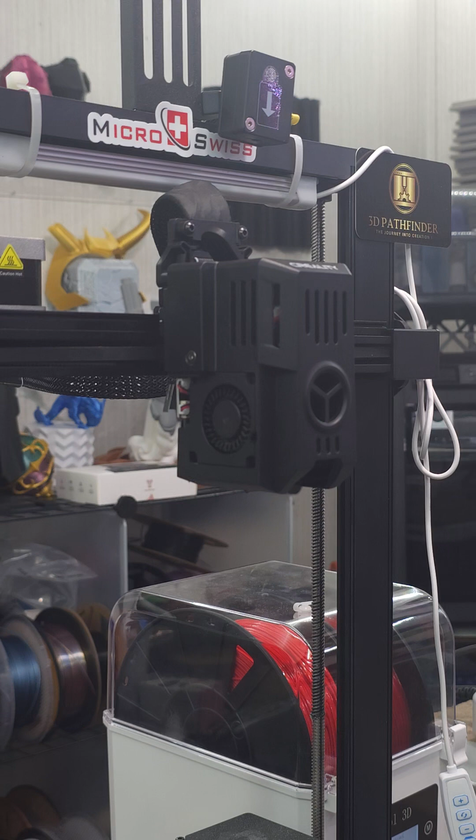What's going on, everybody? Because I don't have a cameraman or anything like that, I'm going to be doing an install on the new Flowtech Hotend Upgrade for the Ender 3 V3 KE, on this guy right here. Now, the directions in this kit are very, very good. It comes with a full set of directions, as you can see, and it walks you literally through the whole process of installing this hotend.

Now, the tools that you're going to need for this: a 1.5 millimeter Allen wrench, a 2.0 millimeter Allen wrench, and a 7 millimeter wrench. Okay, so what we're going to do here, and actually, do I have a 7 millimeter wrench? Let's see. So in the box, you get your brand new heater and a brand new hotend.

Okay, and this is your heating core. You get 2 small titanium screws, and you get a heatsink adapter. I think, what do they call this? They call this copper thermal adapter. Okay, so that's what you get in the box. So I'm going to set that here.

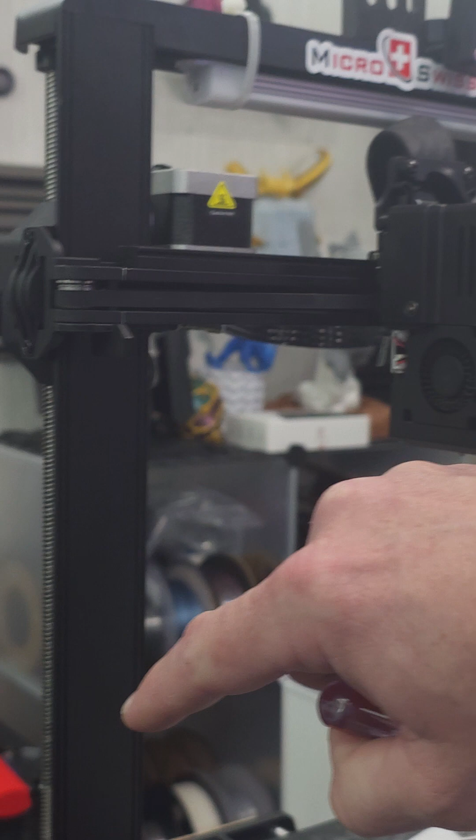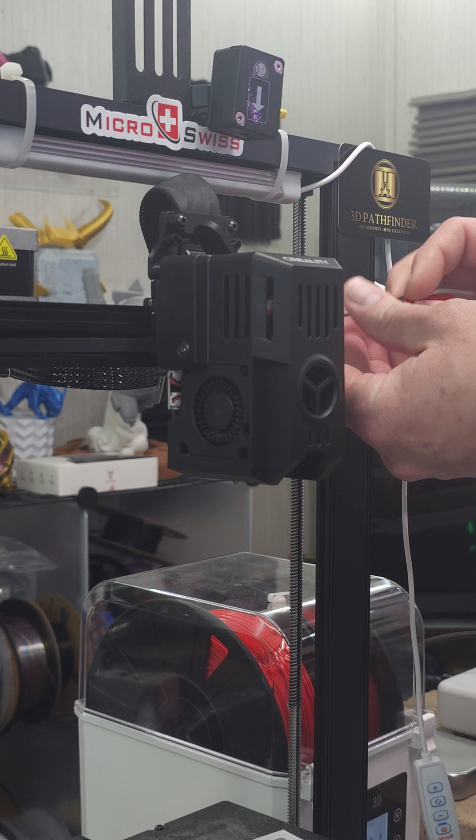Now, first step, what I did do, I powered off the machine and I unplugged the electrical cord. As you can see, the electrical cord is unplugged right down there. So first, as it says right here, remove the 3 screws securing the fan shroud and pull the fan shroud off of the print head. So we're going to start right over here, if I can get this kind of crammed in here, and start pulling these screws off.

And actually, while I'm thinking about it, I wonder if one of these is 7 millimeters. Let's see. Let go. Okay, I'm going to use some magnets here to hold the screws. Set that right here. Okay, we got one more screw over here. Pop this off. There we go. And then this fan shroud should come right off.

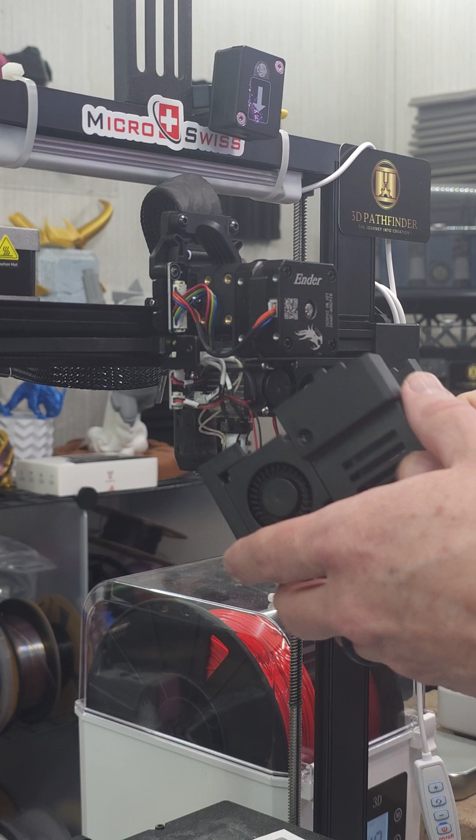Okay, there we go. So we have the 2 connectors right here. It says disconnect the 2-part cooling fan cables from the breakout board. Let me see. I had everything set up, didn't I? Now, if you're first doing this, these are going to have some adhesive on them, just a little piece of hot glue. You're going to have to pop those off.

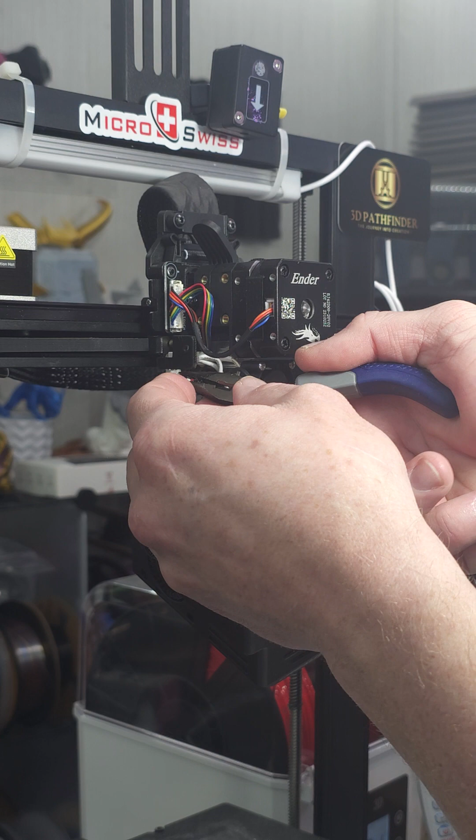Actually, I'm going to put my headlamp on just to get a little extra light here. There we go. And I'm going to grab that little glue blob and try to pull it off. Come on. Well, that other one popped right off. You got to be careful, some of these wires are small. There we go. All right. Got that second little glue blob off.

Then we're going to pop these out. Now remember, this fan goes to the bottom one, and the other fan on the other side goes to the other one. So we're going to pop these out right here. There's that one. And then I might need to use my little things here to grab this connector. Some slack on that right there, and I'll pull that one off. Okay, that might be a booger to feed back through, but there we go.

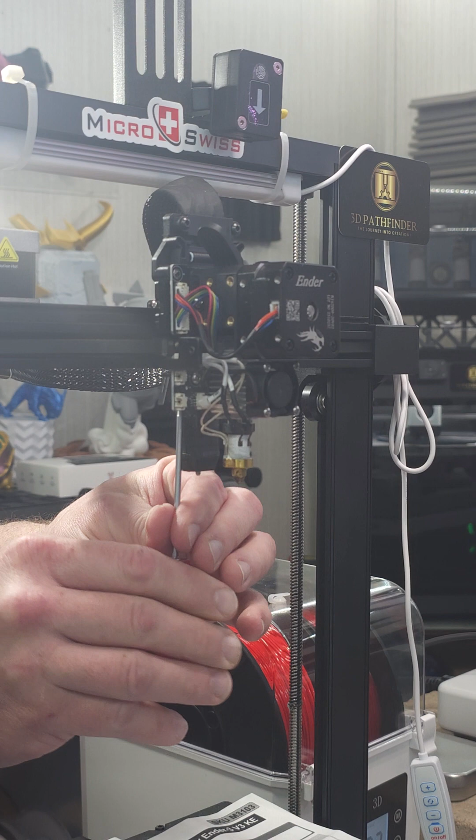Fan shroud is removed. So next it says to remove the 2 screws holding the CR Touch probe. So we're going to go around here on the back. And let's see. Yep, it's the 1.5 millimeter to remove these. We'll pop this off. There we go. Set that back here. And pop this one off.

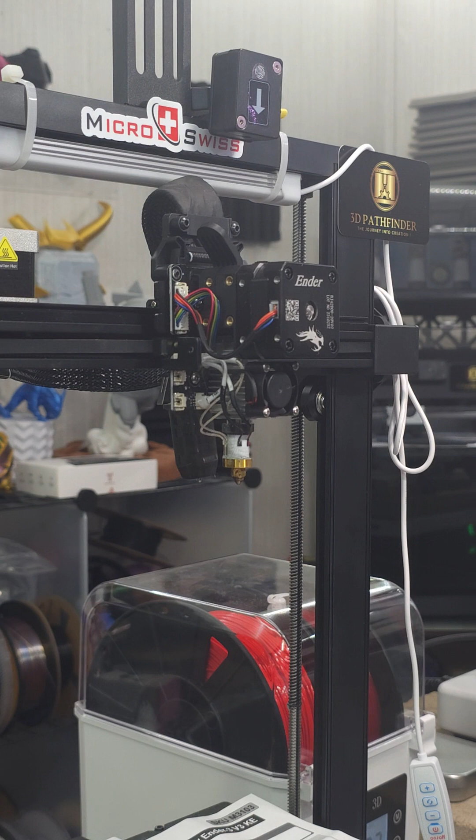All right. Does it say to unscrew or to unattach? Remove the 2 screws holding the CR Touch. It can remain attached to the cable. It will only need to be moved aside to gain access to the set screw. Okay, so it does say you can leave the CR Touch on. Next, loosen the set screw located on the back side of the cooling block. It's the 2 millimeter wrench.

So we're going to grab our 2 millimeter here, come back around, and we're going to move this to the side here. You're not going to be able to see it from this angle, but right in the cooling block, right here, there's a set screw right inside there. Let's see.

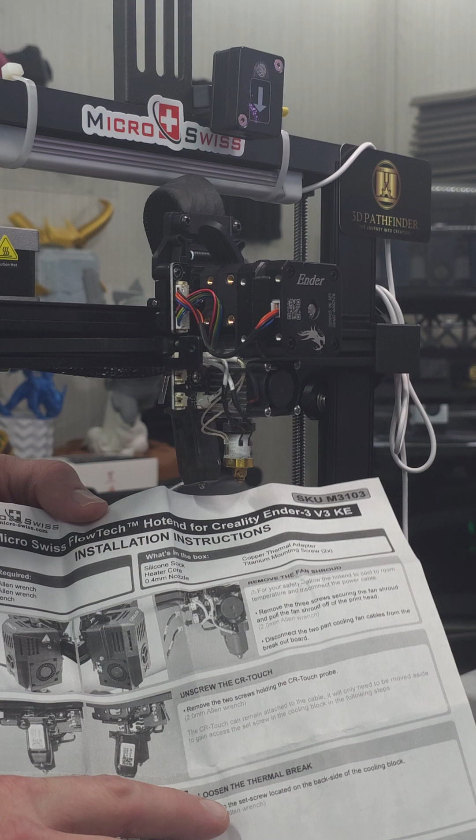Well, that is not 2 millimeters. Yeah, that's not, okay, so I did find an issue in the directions. It says 2 millimeter Allen wrench, but it's not. The 1.75, or actually, I'm sorry, I might have had these confused. Let's see, this might be the 2 millimeter, and this one might be the larger one. So

go right there, and I'm going to just loosen off the set screw. You don't have to take it all the way out. You just back it off because you just got to loosen the set screw for the thermal break. Okay.

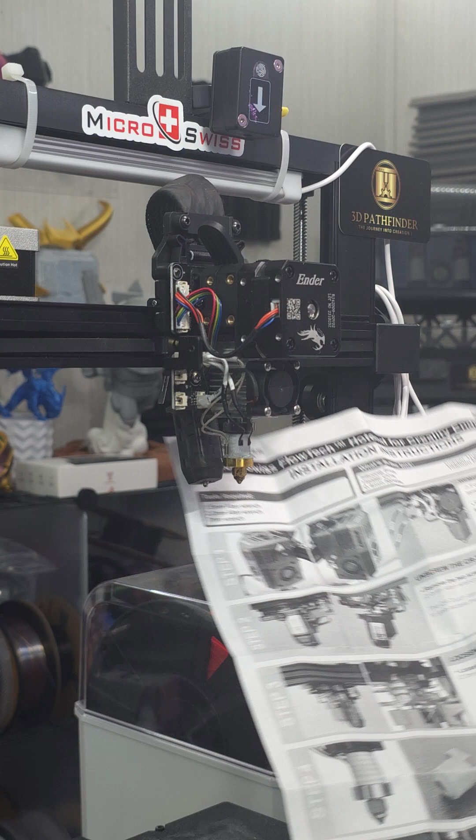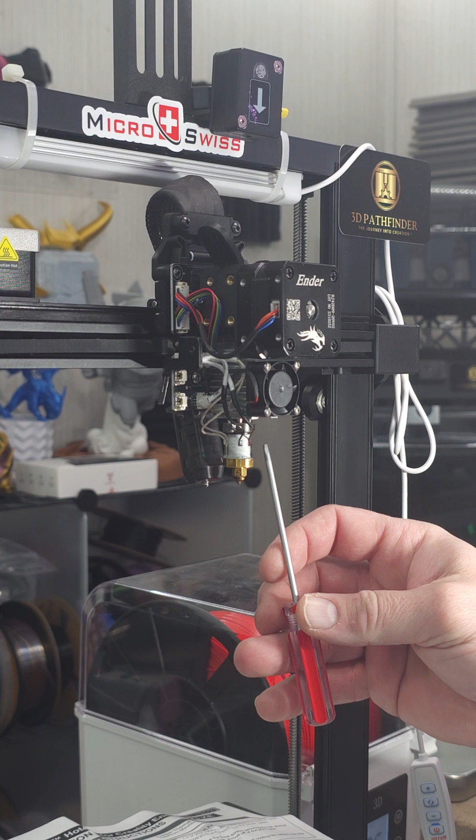So next, it says to remove the sock, but I've already had the sock off because it tore. And then it's remove the heater core, remove the 2 screws that secure the heater core to the cooling block, the 1.5 millimeter. So let's see. I think that's this right here. Okay, so yeah, I did have the 2 wrong ones. Let's see. There we go. So this is 2 millimeter. I had the wrong one. That's my fault.

So we're going to remove the 2 screws that hold that, and it should come out. There it is. You go over there, and it even shows you where to remove on the directions. You know, these 2, it's got 2 highlighted circles around where you need to remove. The directions really are fantastic from Micro Swiss on this. You do not have to be proficient in working on 3D printers or anything like that.

Let's see. Well, why is that one not coming out? What do we got there? I wonder if that one is stripped. That's way too big. Let's see. That fits barely. Let's see.

It seems like I'm in there, but it is not turning. I think that one was stripped. So let me see what we can do here. Let me see. That's too big. Yep, that's not going to go. Let's see.

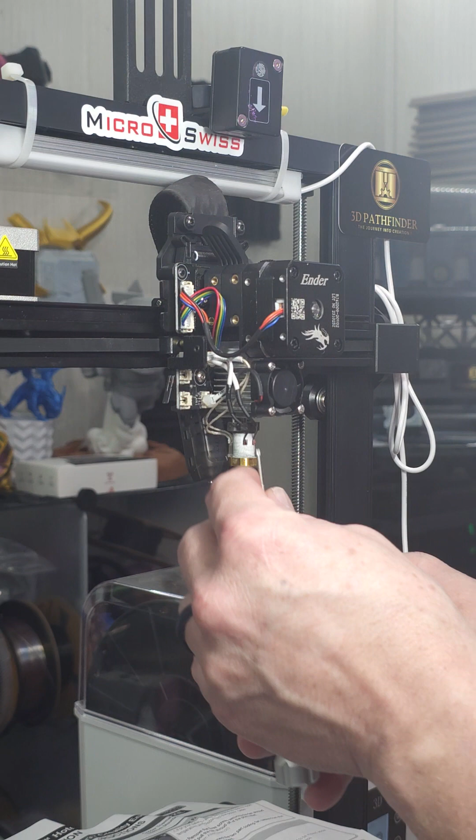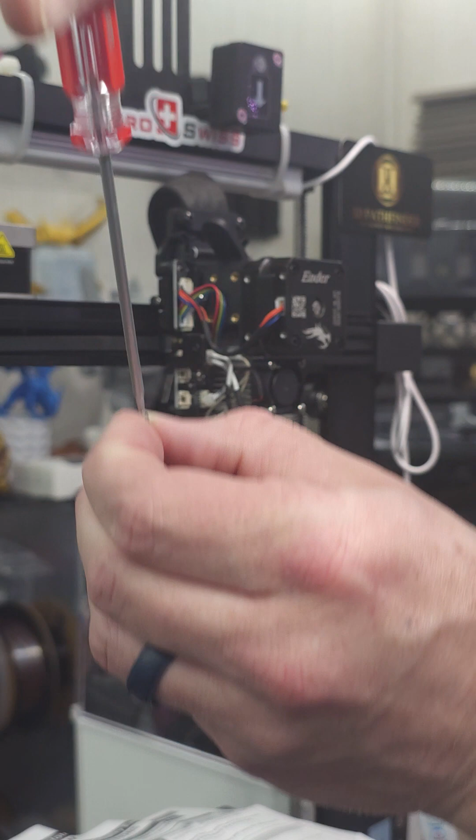Aha. Okay, so I happen to have a Torx bit that will fit it, that actually I can feel grab. I think that other one was stripped, so there we go. Now it's coming out. All right, let's see. Yeah, that is weird. See, I put the 1.5 in there and it just spins. So I think that one was stripped out.

So anyway, remove the 2 screws that secure the heater, disconnect the heater and the thermistor connection from the breakout board. So you're going to pull this out. There you go. And you have 2 connections right here. You have one for the heater core and one for the thermistor. And they're going to have those little blobs of glue on them as well. Yeah, there it is right there.

Let me see if I can get that off. There we go. There's one blob out. And I can see the other blob here. Let go, let go, let go. Okay, I think it's disconnected. So we're going to pull this off. Come on. You have to be careful with these tiny little connectors. There we go. All right, the heater core is out.

And then, let me see. That is glued to the housing of the wire. So I'm going to cut that off there. There we go. Got the other little blob off. So now, and this connector is facing the opposite direction. So there we go. All right.

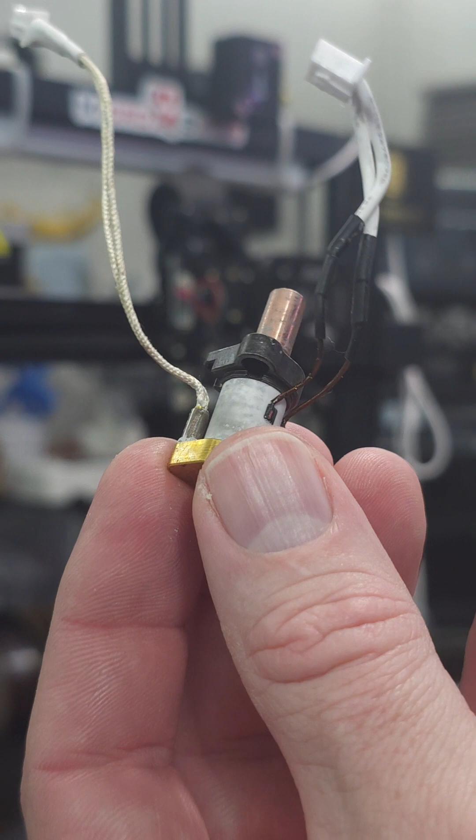So there is your factory heater core. Little remnants, I'm sorry about that. There's your factory heater core. Okay. And your factory nozzle. Now we reverse the process and we put in our handy dandy new one. But there's some things that are involved.

So what you're going to do is you're going to install the copper thermal adapter up into this cooling block right here, or the heat break. So I'm going to find that, which is right here in your package. Come on out. There we go.

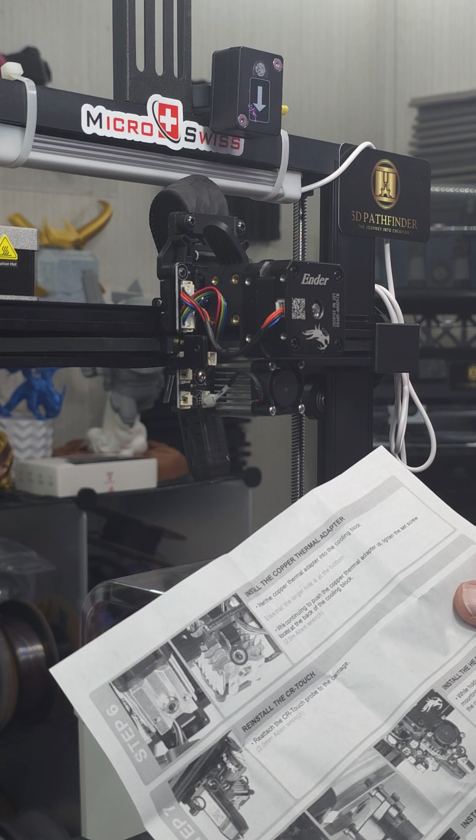And let's see, insert the copper thermal adapter while continuing to push. The thermal adapter, tighten the set screw located at the back. Okay, so we're going to come around to the back here.

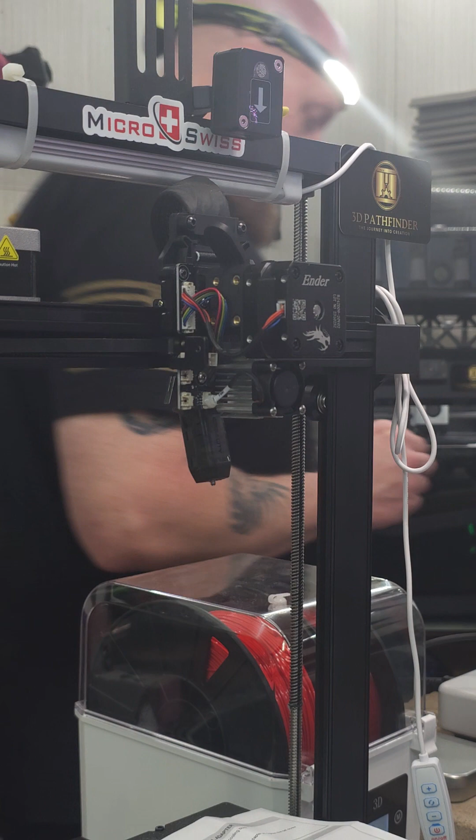All right, so I'm guessing, let's see, there is a, I don't know if y'all can see this, but I'm going to try to show y'all. It doesn't specify, it does look like... Okay. So I don't know if you can see this, but you see how that is wider on this, and it is smaller on this. So by the pictures,

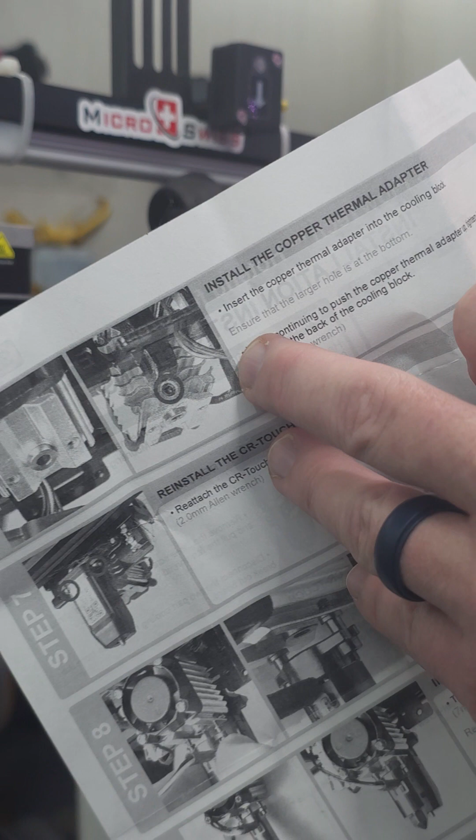see, it says right here in the fine print, ensure the larger hole is at the bottom. So see how they cover everything? I just had that question, but I didn't read. So the larger goes to the bottom. So come around here,

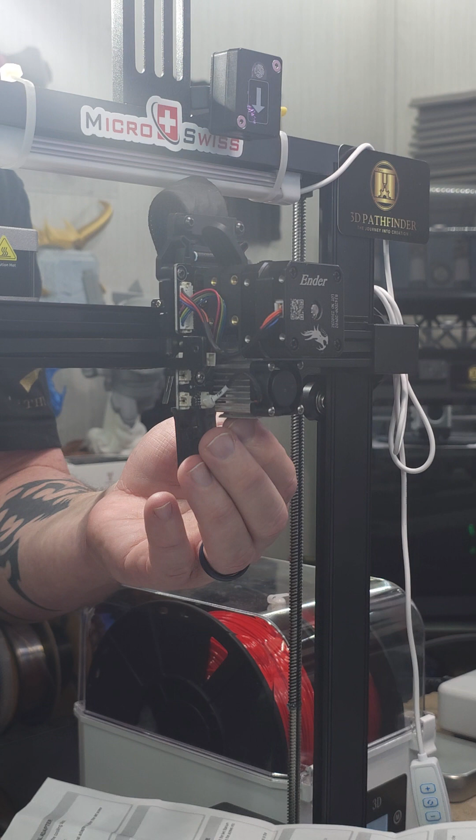and we're going to insert that up in, and it says, while continuing to push the copper thermal adapter up, tighten the set screw. So I'm going to come in here, and we're going to tighten that if I have the right Allen wrench. So we're going to push up on it, and then we're going to just tighten the set screw.

There you go. You don't have to torque on it. Just tighten it down, hand tight. It doesn't have to be torqued on or anything like that. Okay. So now it says we can reinstall the CR touch probe to the carriage. And that is with the 2mm Allen wrench once again. So we're going to come back around here.

Take these two little screws that I did not lose, and we're going to reattach the CR touch here. There we go. These are magnetic tips on this. This is just a little inexpensive set of 4 that I got off of Amazon, as you can tell. So tighten that down. There we go. All right, CR touch is back in. And then we're going to go to the next.

So now it says, while holding the heater core with 2 titanium mounting screws on each side, push the screws into the cooling block. Tighten with the 1.5. So you have the 2 little titanium screws that come, and pop these out. This is very similar to the one that they have available for the K1 and the K1 Max. These screws are significantly shorter than the ones for that.

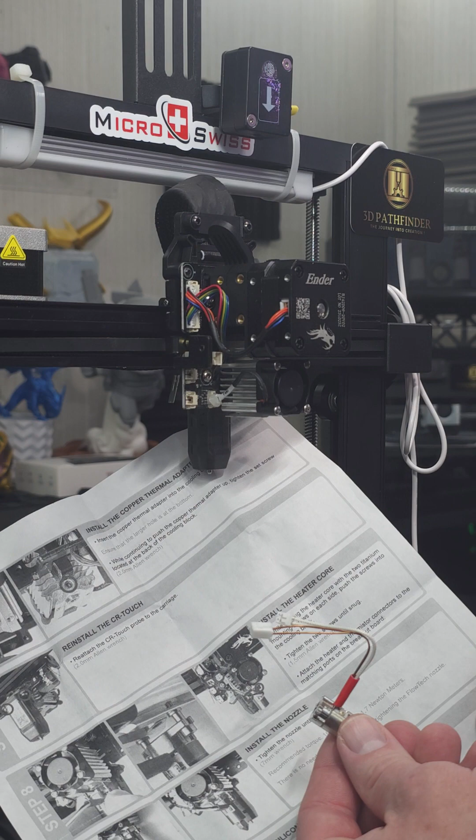Let's see. I wonder what's a better fit. Yep, that's a better fit. So we're going to do that. And then, okay. Yep. So we take our heater core. And you have the 2 slots there that hold the, now the wires for this, attach the heater and thermistor connectors.

So you're going to see by the picture, your wires are going to come forward. Now that's different on the K1 and the K1 Max. They go backwards. So I'm going to hold this. This is a little tricky, but there's these 2 little, so I'm going to try to hold these and get this up in there. Okay. Let me set. That ain't going to stay.

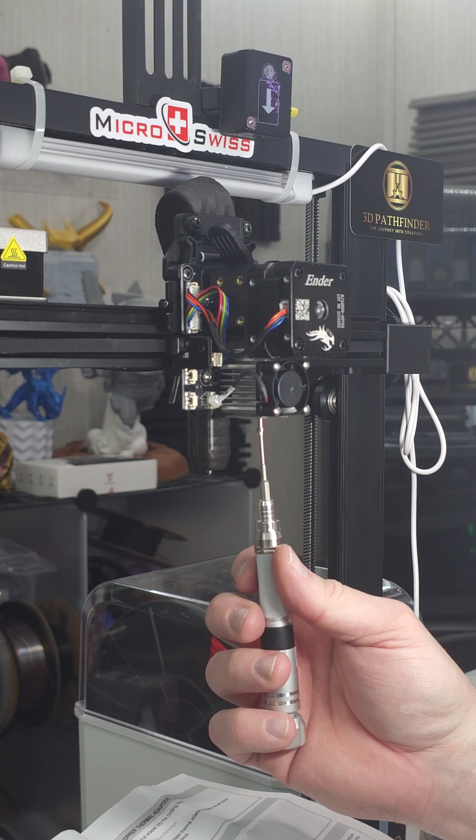So what we're going to do is we're going to start one right here. I'm going to start that one, and then I'm going to come in with this, and I'm going to hang it on that. Well, I'm going to try to hang it on there. Get my other screw here. Such tiny, tiny things here.

I could make a joke and say I'm used to that, but yeah, this is family-friendly content.

So now we're going to tighten that. Why are you? All right. Back this off. It's wanting to cross thread there. It wanted to cross thread there when I first tried to put it up there. Now that's as tight, and that is tight.

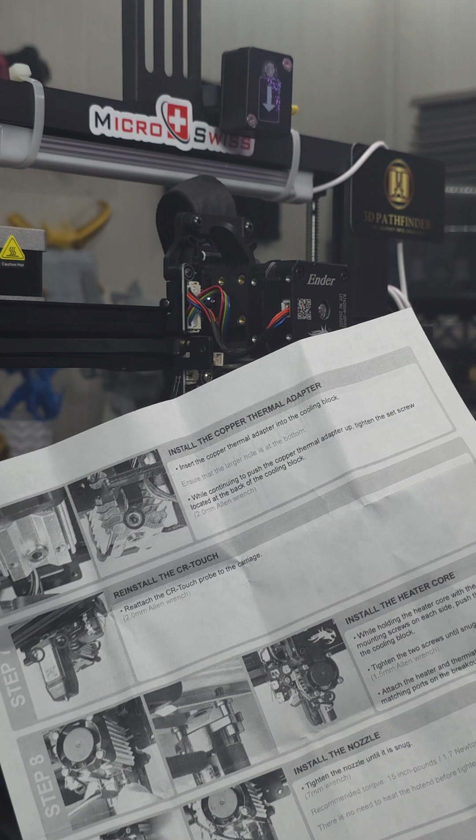And there'll be still a little bit of play to this because the nozzles themselves actually tighten the heater block, okay? And I think it even says that. Let's see, mounting screws on each side, push the screws into the cooling block, tighten the 2 screws until snug, attach the heater on the breakout board, and then it's tighten the nozzle until snug.

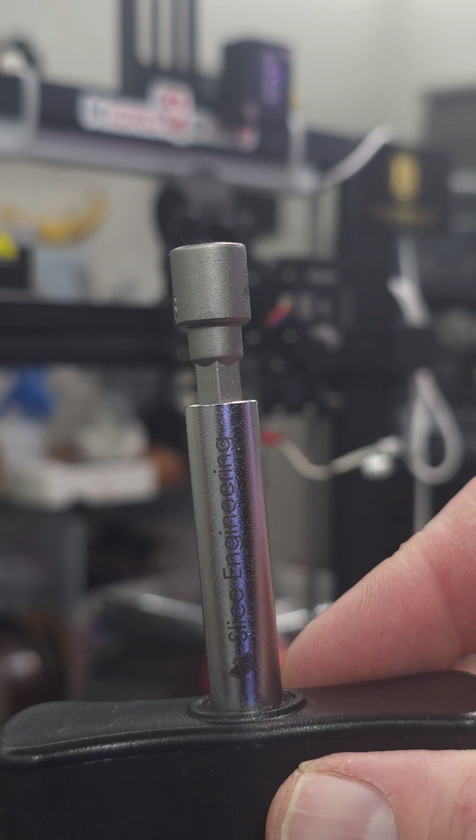So I have a handy dandy little, this is a torque wrench for 3D printing nozzles, and this is actually a 1.5 Newton meter, okay? And it's by Slice Engineering, and it's very handy. There is a recommended torque spec. I think they say 15 inch-pounds, which is 1.7 Newton meters, and this is 1.5.

But I have been using this to tighten my K1 Max nozzles every time I change them, and I've never had an issue. So 1.5 in my case is close enough. So we're going to go ahead and put a 0.4 nozzle back in there. And Micro Swiss sent me out some of their nozzles, as you can see. So we're going to put that up in there.

And the nozzle itself actually tightens down the, okay, so we need to reconnect these two. So probably be easier to do the thermistor, well, let's see, which would be easier first? Let's see.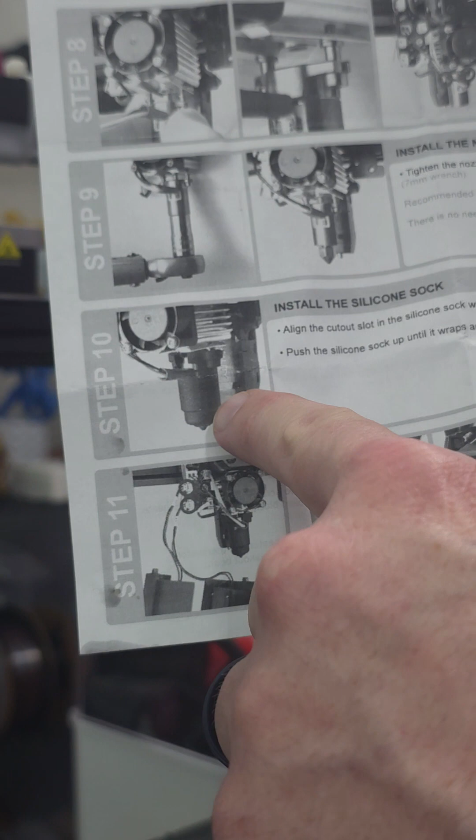Actually, let me clean up my space here. What did I do with the other? Did y'all see where I set that other heater core at? Oh, set it over here. I'm going to put the old heater core in the box. I'm going to put the screws that hold it in there. And we're going to keep that as a backup.

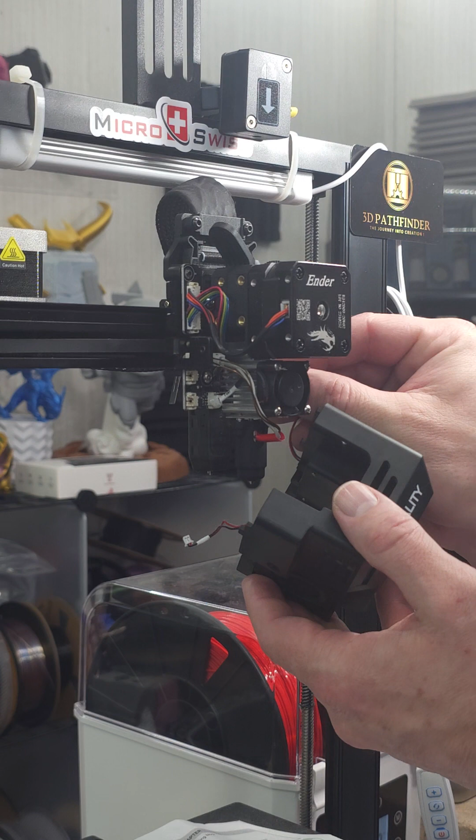So let's get the silicone sock out here. And it's going to go forward this time because it's got to go around the wires and stuff. And there we go. And then we simply reattach the fans. So we're going to feed this back through here. Maybe. Come on. Come on. There you are. No, come here. Okay. There we go. So now we pop that back in. And we pop this one back in.

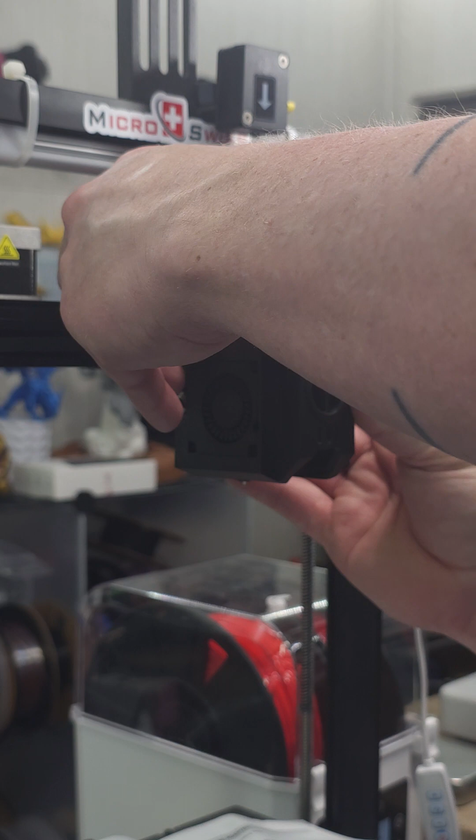There we go. And then we reinstall the fan shroud back on here. Tuck all your wires in, make sure that everything is tucked in. What am I hitting on here? There we go. Okay. What, is that not sliding right back on? Okay, that side is good.

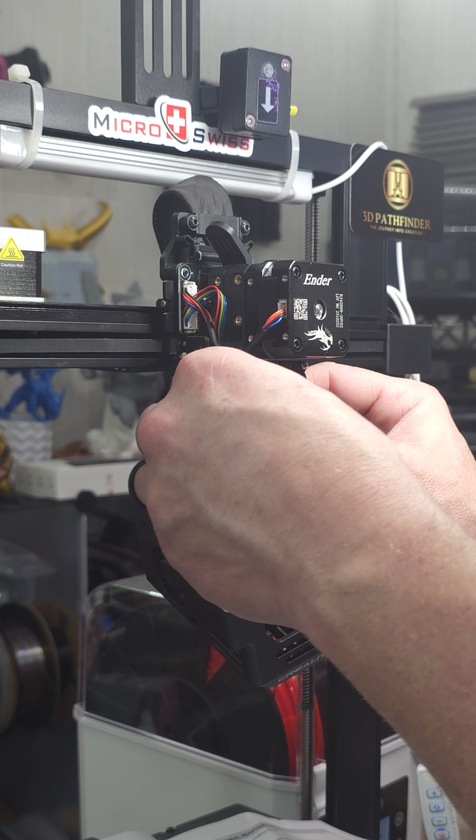And a little bit, let me see. My wires. Tuck that in. Tuck these in. Make sure everything is tidy here. Okay. There we go. All right. Now, reinstall the fan screws here. If I can find the right, there we go. One screw there. And one screw there. And then one screw over here.

Now, once you finish this, you're going to want to turn everything on. You're going to want to verify that you have readings from the hot end and all that through the thermistor. And then since you did move the BL Touch, you're going to want to go ahead and just do a recalibration, okay? And get this all put up right quick.

Sorry for that. And we're going to get her plugged back in and turned on, and we're going to see if sparks start shooting or fire breaks out, and y'all get to laugh at me for being a dip. So, all right. Put all that back. Let's get our power cable here. Plug it back in and turn it on. So, no fire yet. Let's see. Just waiting for it to power back up.

Let me pull this out right quick. Had it in a little phone holder here. All right, so turn this off and turn this light off. There we go. We got readings from the thermistor, and the heat bed is cool. So now what I'm going to do is just recommend going in and doing an equipment self-test. And we're going to do auto Z offset and auto level. And that's it. All right.